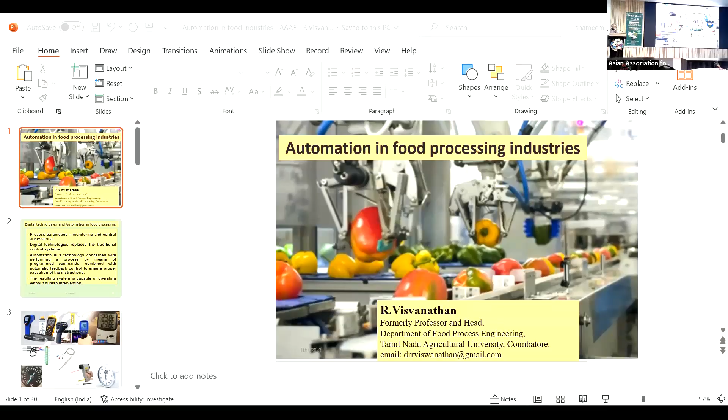Food industries, especially in India, work 24/7. Whether it is any national calamity, COVID, heavy rain, or a hurricane, there is never a day we don't get a milk packet at our doorstep. That is an example of how our food industries work, irrespective of any disturbances they face.

Food safety is about ensuring we do no harm to the consumer. The concept is through Hazard Analysis and Critical Control Points, where the hazards in the process to preserve the food materials are identified and eliminated.

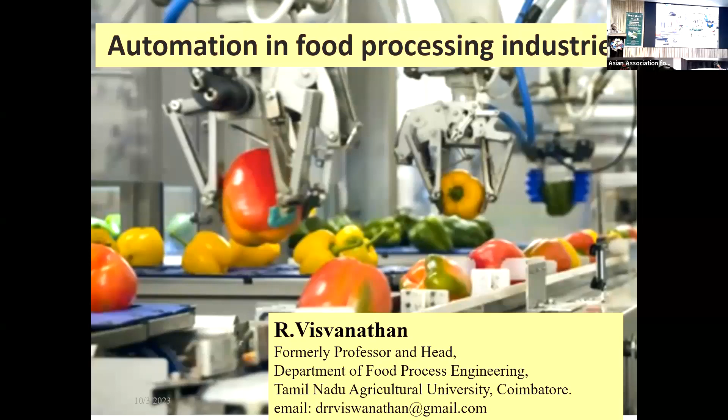We are following or adopting different instrumentation facilities to measure and control the various parameters, linked to analog systems and digital recording systems as well. Now we are moving towards full automation, which though it reduces the manpower required in the production line, ensures precision in the applications.

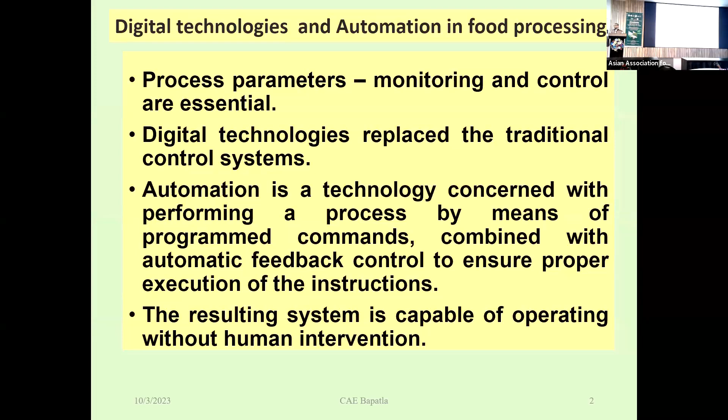Precision next. These are some of the instrumentations we followed and are still following.

Yesterday we had more presentations with respect to implements and water-saving concepts. Today, something on post-harvest.

We are talking about drones, mainly for spraying. Drones also have applications in judging crop maturity, looking at whether maturity has been attained uniformly, and monitoring pest attack.

Sir has rightly mentioned my editorial contribution to the journal. I received one manuscript from an engineering institution. They developed an app that takes a picture of the field with the pest, analyzes it, judges the type of pest, and gives a recommendation accordingly.

Suppose we do the harvesting, windrow the crop, and allow it to dry—you can judge whether the drying of the crop has reached the required stage. I think the crop is viewed aerially for judging its quality.

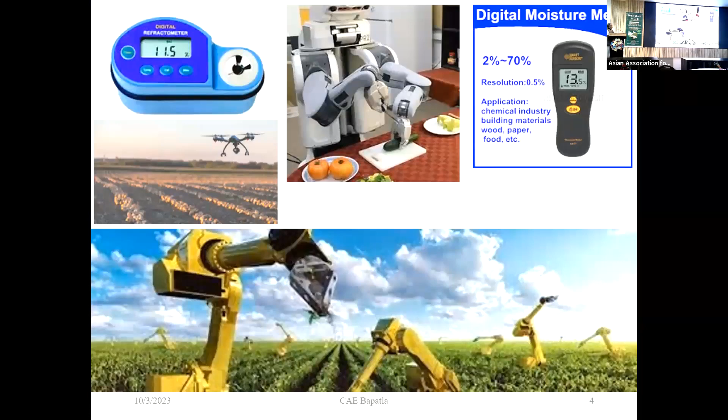There was a refractometer. Earlier we used the handheld refractometer—you drop off the sample and move out of the room to view it in sunlight to judge the TSS. Now see the digital one, which works even under room light.

There are other various instrumentations used in processing industries for measuring gas flow, the flow of juice and other pulp materials, velocity of air, and measuring flow rate—the older technology being the venturimeter.

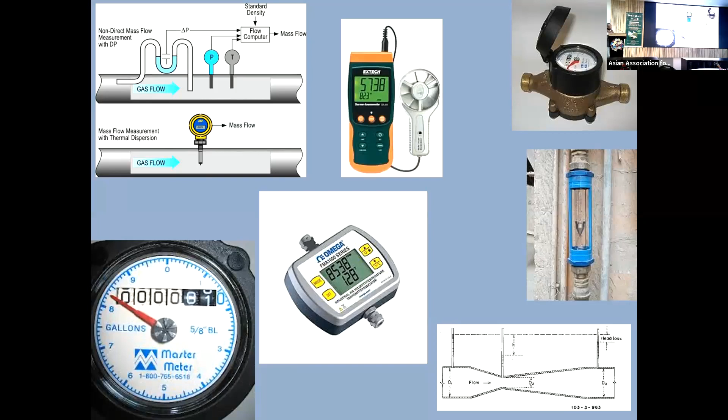Then the machine vision system plays an important role in food industries. For example, in a bakery production line, the top layer can get charred when exposed to temperature. Temperature and time are the critical points in the bakery, and sometimes it gets charred, so the system helps remove those charred ones.

Then sorting of fruits and vegetables, especially fruits, based on ripeness and color—if the color is not to the required level, they are removed or sorted in the production line. These are some good examples of automation in food industries.

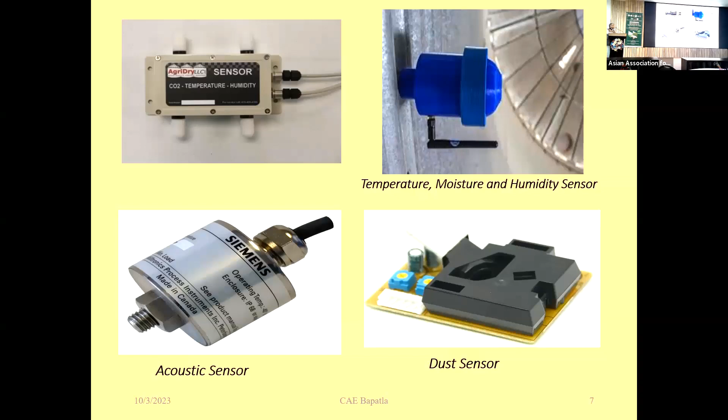Then we use sensors, starting from sensors for gases, sensors for measuring pH, acidity, sugar content, and so on. They help in adding or removing those constituents during the production process.

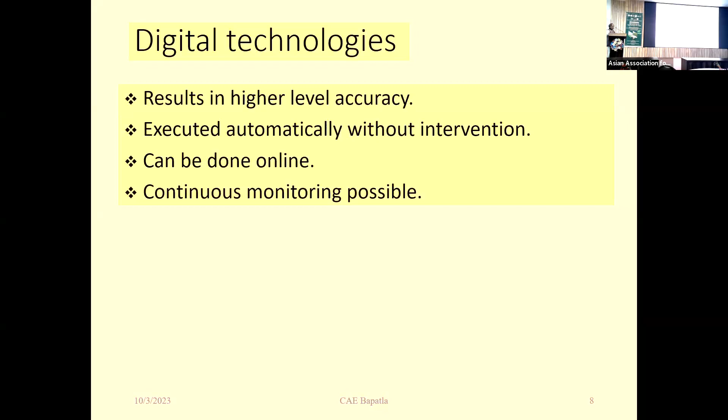Digital technologies, with a higher level of accuracy, are useful in automation. They result in precision control of the parameters.

The advantages are reducing wastage and reprocessing. Suppose something goes wrong, the entire batch will be subjected to reprocessing. That can be avoided or minimized when you go for an automated system to control the process parameters.

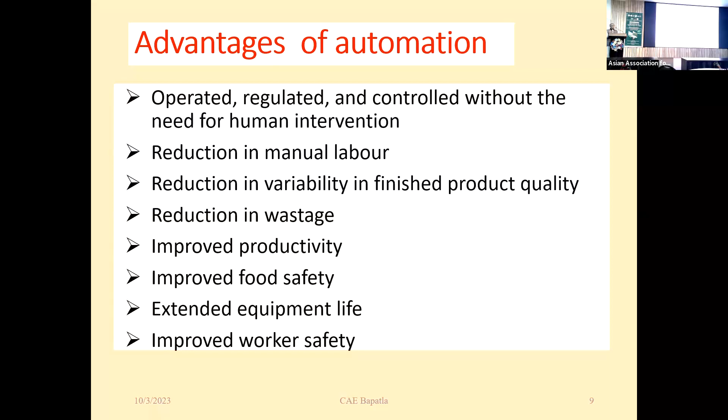It improves worker safety. Workers need not stand near the hot pan or in the process line with anything hazardous in nature. They can be away and monitor whether the process is as per schedule, and through automation that is made possible. The different tools used in automation.

Again, the same things with reference to different types of industries.

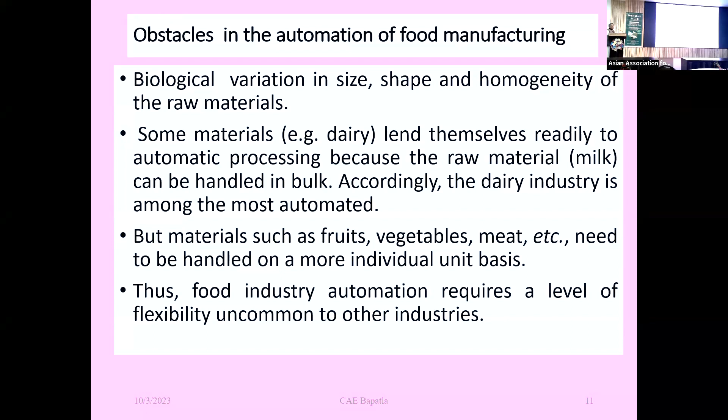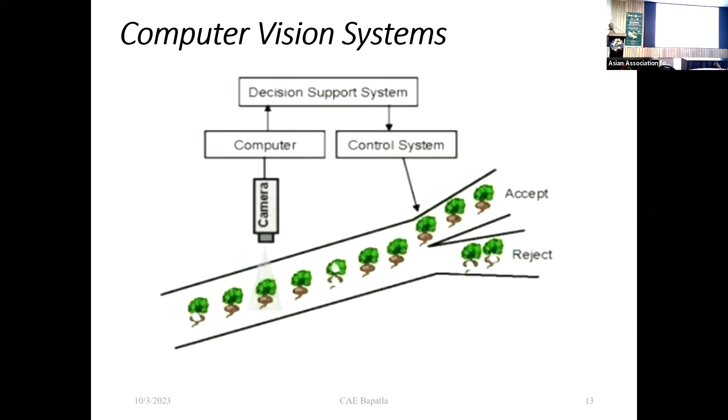There are some bottlenecks, again maybe the initial investment. And this machine vision system where they are divided into acceptable and to be rejected.

So this automation, how it increases the production, productivity, increases the profit, and also ensures the quality.

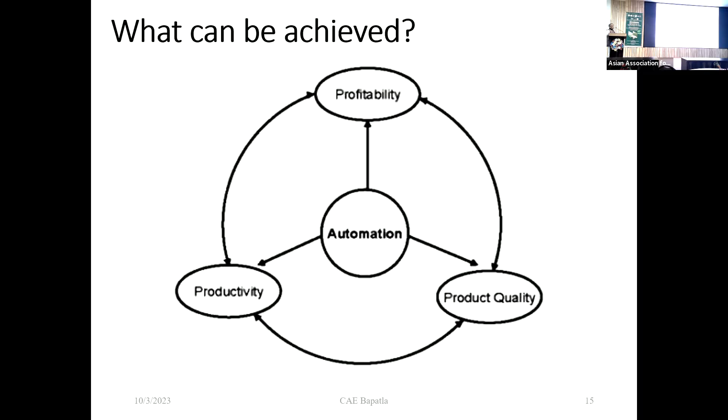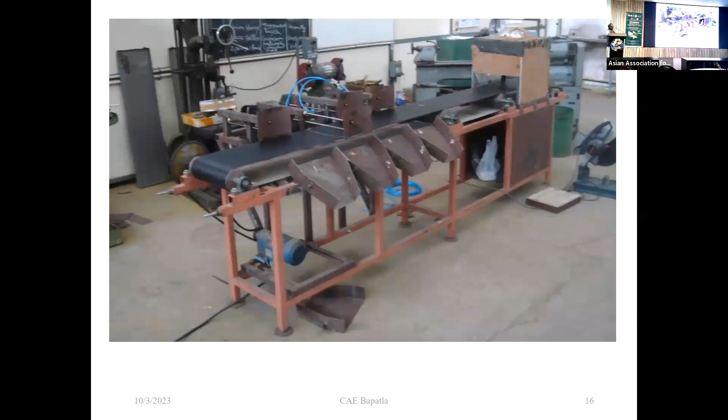It's one of our experiments in our laboratory using a machine vision system to grade according to ripeness. We also tried to develop based on size, but we could not succeed because the requirements are different.

Then machine vision system in filling and packaging, to ensure that the filling is done up to the level required, or that it is not having any hazards floating at the top of the package. So it is ensured through this machine vision system.

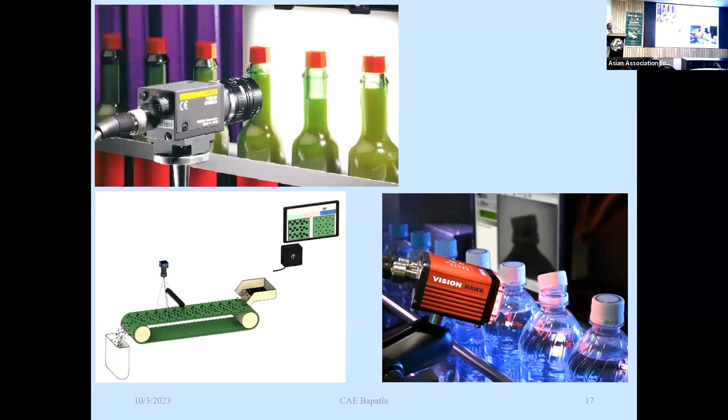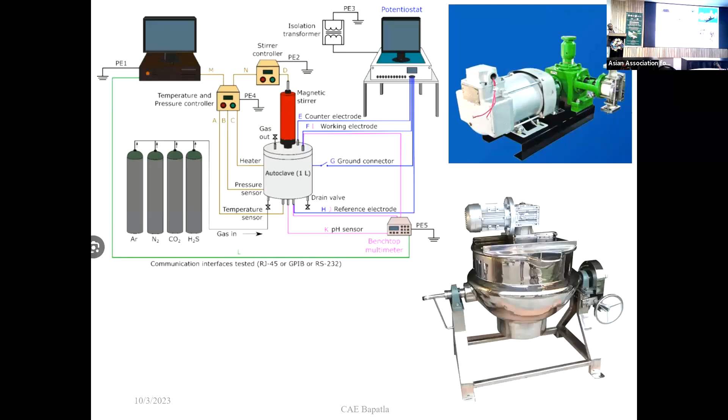In the drive systems, we use motor with belt drive, chain drive, and later we started using the gearbox. Now the motors with the gearbox attached are called gear motors.

For example, in the process of making jam, we take fruit juice and all the ingredients are put in. It will be with a TSS of around 4 to 10 degree brix, and that will be solidified by the application of heat up to 65. When the solidification increases, the stirrer used needs more power.

Ultimately, the power of the motor is made to match the torque required at a higher brix level. So that is a problem in the food industries where we need some mechanism so that the power requirement can be reduced and synchronized with the torque requirement. So that is one thing.

Then in the case of online sorting, the machine vision system judges whether it has to be accepted or rejected. But the process of rejection or acceptance takes place after a certain travel path, that is the response time. I don't know the exact terminology in automation.